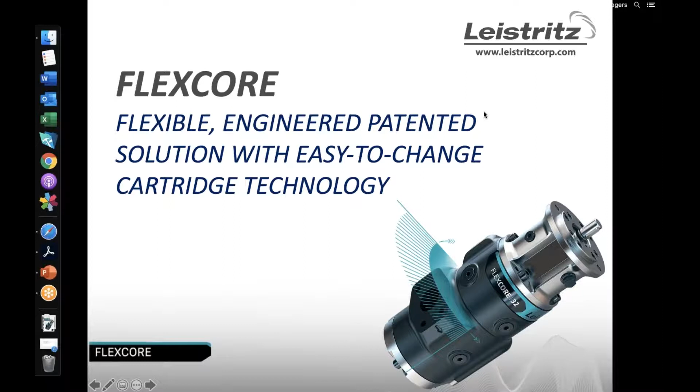I want to start off by giving a quick overview of Leistritz Advanced Technologies Corp. As you can see, Leistritz has been around for over 100 years. The company was founded with the goal of developing exceptionally engineered products, and this tradition continues today. The first product manufactured was turbine blades, and 20 years later, the first screw pumps were produced. We've continued to modify the design to meet current requirements by working closely with customers and the industry, proving ourselves as industry experts and leaders in engineered solutions. While our product development started and continues in Germany, we've been in Allendale, New Jersey for almost 50 years supporting the Americas with value-added solutions, product management, customer support, and sales engineering.

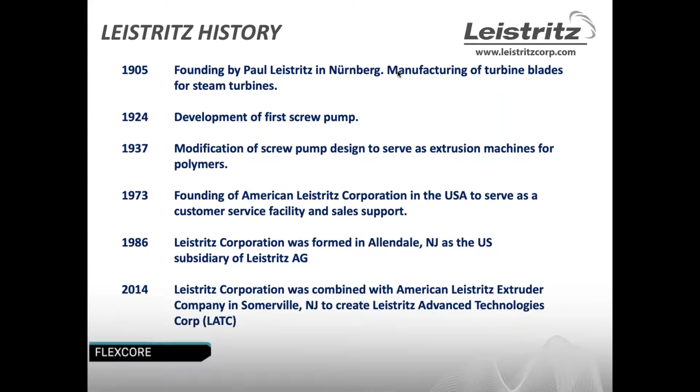Today's Leistritz Advanced Technologies Corp, or LATC, is made up of 4 divisions: screw pumps, machine tools, turbine blades, and extruders.

Today we are going to discuss the Leistritz Flexcore pump series, the applications it can be used in, and a brief overview of the pump technology and features. We also have an animation and video showing the features of a Leistritz Flexcore pump. Our hope is when you leave this webinar, you have a better understanding of the Leistritz Flexcore pump series and the benefits it can provide.

Here are a few applications that are a great fit for a Leistritz Flexcore pump. Flexcore can be used in a wide variety of markets doing multiple applications, serving end users and OEMs, including lubrication services for compressors or turbines, seal or lube oil consoles, boilers for burner or fuel oil, and marine applications for engine room lube oil or fuel oil.

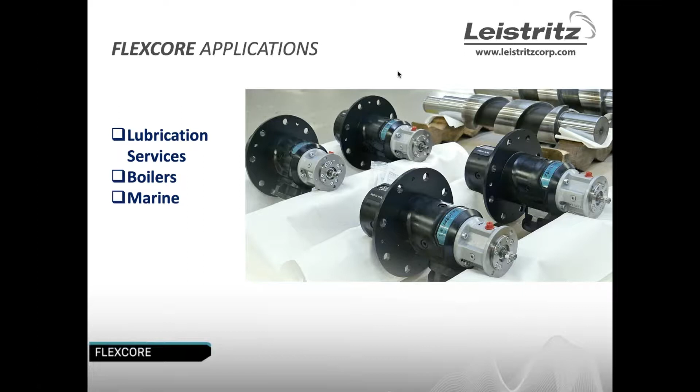Before we go into the specifics of the Flexcore pump family, I want to spend a minute talking about the technology behind Flexcore. It is a 3-screw pump containing 1 power rotor and 2 idler rotors, 1 mechanical seal, and 1 external bearing. All of this is housed in a pump casing that has the suction and discharge connections.

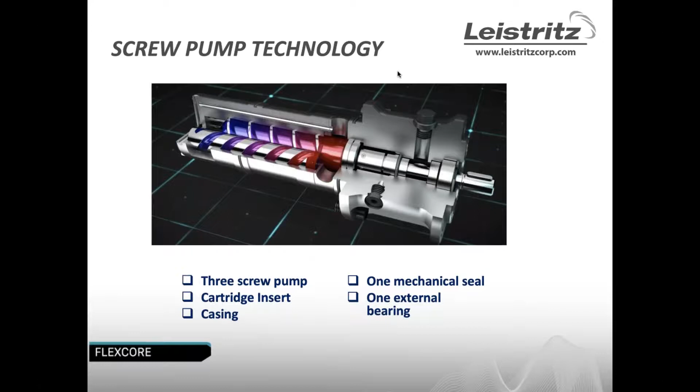Now we are going to get into the specific design and features of the Leistritz Flexcore pump series. The Flexcore cartridge insert, shown on the right, is easy to change cartridge technology that makes changing the pump rotating elements faster and easier than ever. In combination with the proverbial Leistritz quality, which is virtually wear-free.

The Flexcore has a patented internal hydraulic balancing system that provides the following technological advantages. It hydrodynamically balances the rotors within the pump. It moves the pump fluid through the mechanical seal chamber, preventing heat buildup. And finally, because of this internal balancing, the mechanical seal only sees suction pressure. It does not need to be designed to handle discharge pressure.

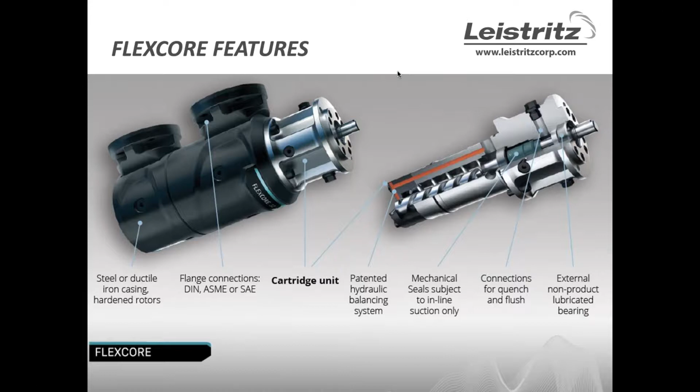The materials of the Flexcore casing come in two options. On the left is the Flexcore SC, which has a carbon steel casing. And on the right is the Flexcore CC, which has a ductile iron casing.

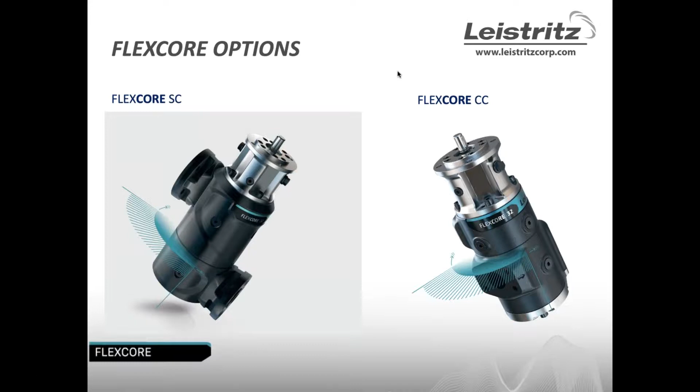The Flexcore pump family is the next evolutionary stage in the pump sector. The custom modularity of the housing and patented pump insert allow the Flexcore to adapt to any installation position. The suction and discharge flanges can rotate in 90-degree increments independently of each other, allowing customers maximum flexibility for their system layout. The Flexcore also has the option of the suction flange being located axially, as you can see in the orientation shown on the far right.

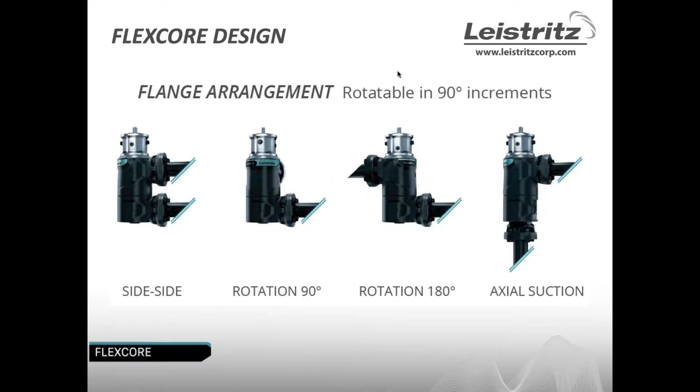There are many options for mounting the Flexcore pumps, depending on the application and space available. These include flange mount, foot bracket mounting, and also tank mounting.

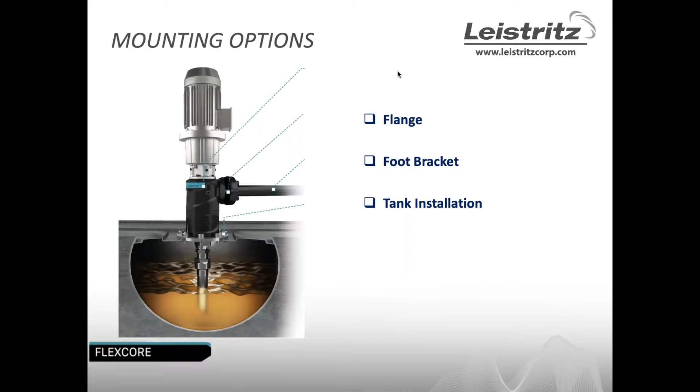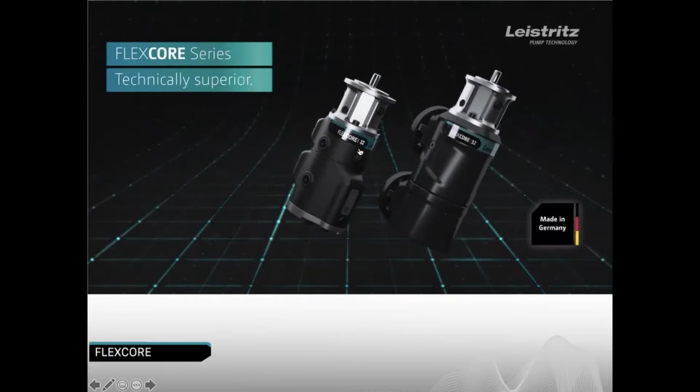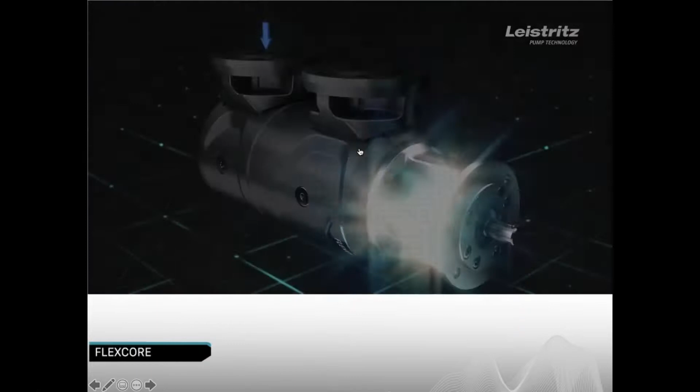Here we have an animation of the Leistritz Flexcore showing the design features that we have been discussing so far. The blue arrow indicates the suction flange of the Flexcore, while the red arrow is showing the discharge flange. As mentioned earlier, the flanges can be rotated in 90-degree increments independently of each other, while the suction flange can be changed to axially as needed.

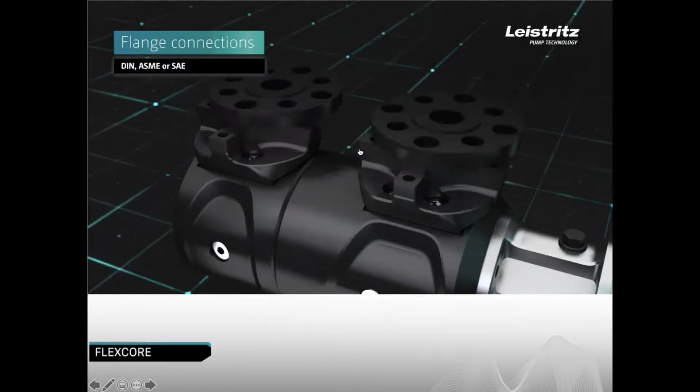The flange connections on the Flexcore are suitable for DIN, ASME, and also SAE, allowing maximum options for customers to modify the Flexcore as needed.

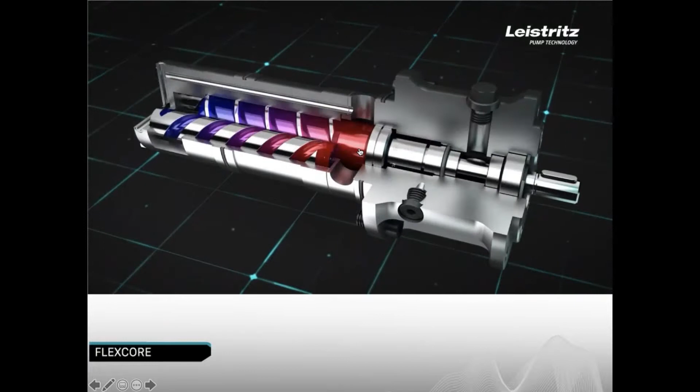Now you can see the cartridge of the pump, specifically the internals of a Flexcore, in operation. The pump fluid enters from the suction side, shown in blue, and moves towards the discharge of the pump. The internal balance line can be seen running across the top of the cartridge.

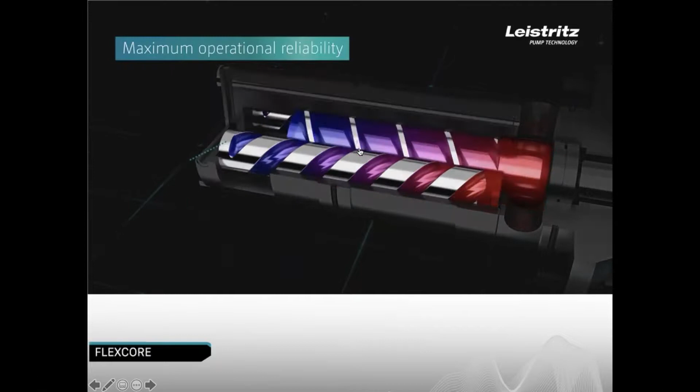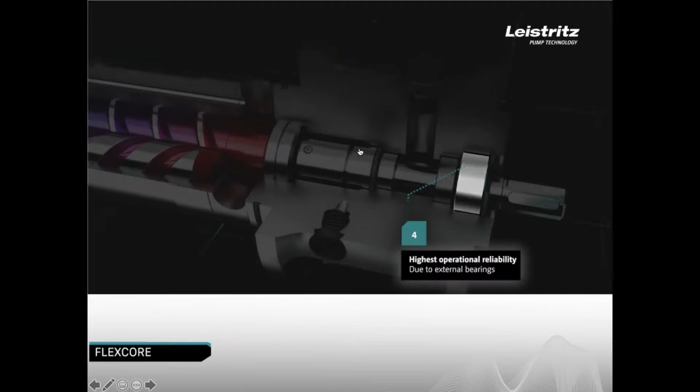The Flexcore mechanical seal chamber is designed for common DIN mechanical seals. The bearing is external and does not come into contact with the pumped fluid. As you can see, only 4 screws are needed to be removed in order for the cartridge to be taken out of the casing.

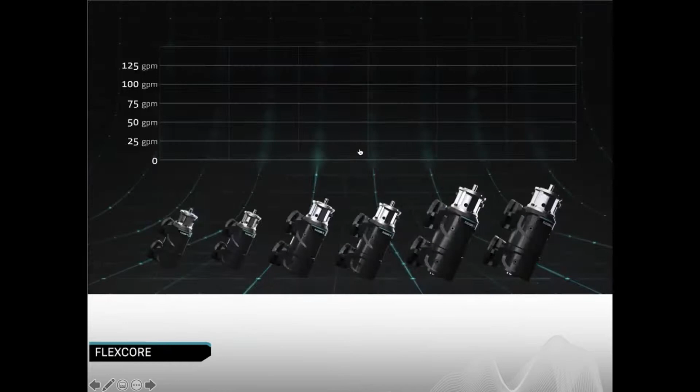Here are the 6 available sizes of Flexcore units and their flow ranges.

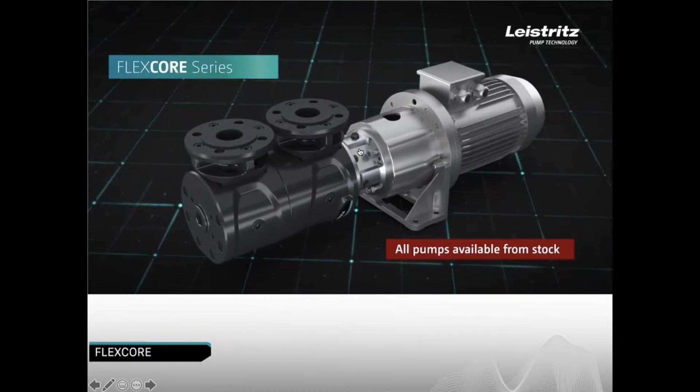Finally, we can see a Flexcore pump that is horizontally mounted using a footed pump-to-motor adapter that supports both the pump and the motor.

Here is an overview of the operating ranges of the Flexcore series. The viscosity range is 1.1 to 2,500 centistoke. The maximum operating temperature is 356 degrees Fahrenheit. The maximum allowable suction pressure is 116 psi, while the maximum differential pressure is 580 psi. The flow rate ranges from 1.8 to 149 gallons per minute.

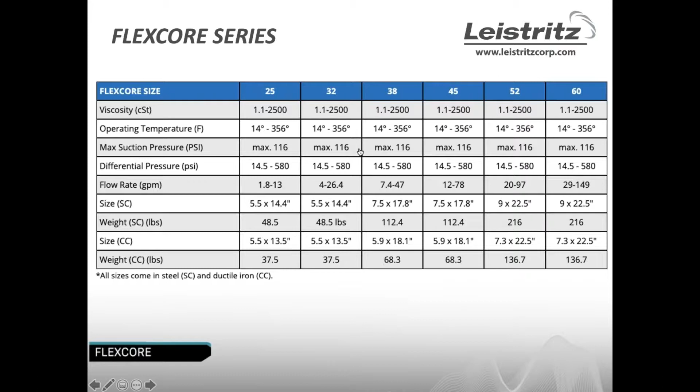Here are the key benefits of the Leistritz Flexcore. The flexibility that the Flexcore provides by having 20 different flow direction possibilities allows it to replace almost all screw pumps that are customarily used in the market and even in existing systems.

The pre-assembled cartridge, certified easy to change, reduces downtime. Instead of replacing the entire pump, only the pump insert is required.

The Flexcore SC, the carbon steel casing option, meets API 614 and 676 standards, except for a few comments and clarifications that will be provided with any Flexcore quotation.

The custom modular design allows the pumps to be delivered from stock within a very short period of time.

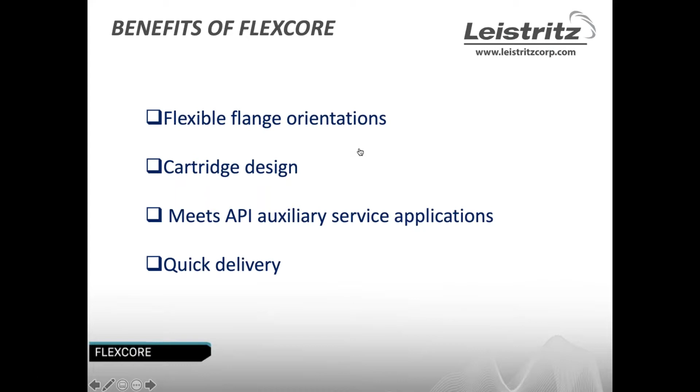Here we are going to go over 2 case studies from customers that have benefited from the exceptional features of the Leistritz Flexcore pump series. The first case study is from a lube oil console OEM. A lube oil OEM had finalized their project design, ordered and received delivery of their Flexcore pumps.

The end user had unforeseen changes that required modifications be made to the lube oil system, resulting in design work and retrofitting of piping by the OEM. The fact that the Flexcore flanges rotated orientation post-manufacturing and delivery allowed the OEM to easily make the necessary changes, saving time and money for the end user on change orders while keeping the project on schedule.

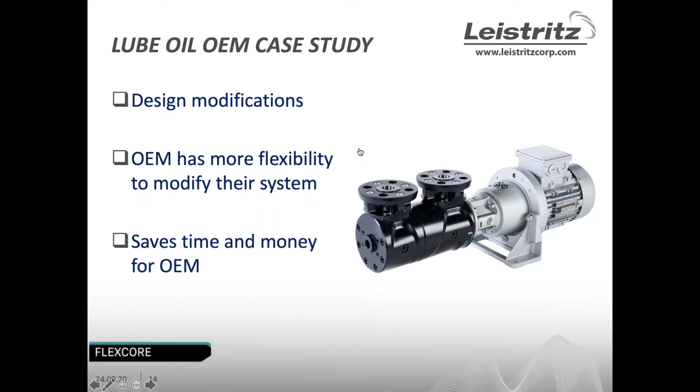The second case study is from an end user in the energy market. In the past, this end user has had to change the type of pump being used at their facility when the type of fuel oil changed from heavy to light.

They also had to modify their piping when installing the new pumps that were required to accommodate the change in fuel oil. The customer chose the Leistritz Flexcore pumps because of its ability to handle a wider range of viscosities than other pump technologies, eliminating the need for future pump or piping modifications in the event that the viscosity ever needed to be changed again.

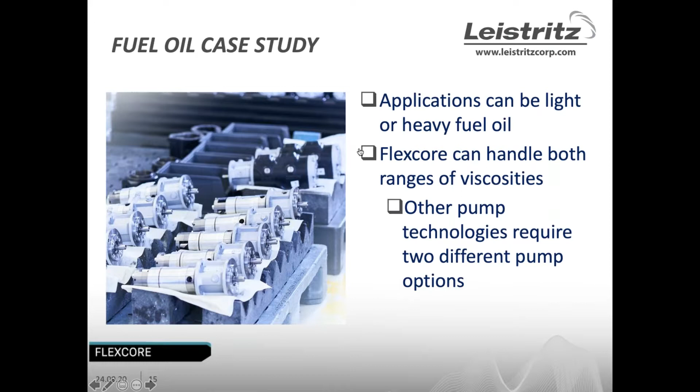To show how easy the Flexcore pump is to work with in the field, we have put together this quick video. Obviously this video is sped up, but in real time, this took 5 minutes from start to finish.

To change the pump insert, you only need to remove 4 screws. The easy to change cartridge technology can be completed without the need for special tools and without special knowledge.

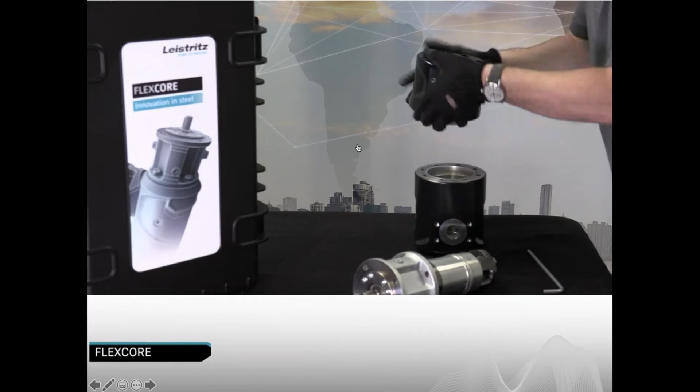The same is true for rotating the flange orientations. Only a minimum of screws need to be removed. Here Ken, our service manager, is showing the different possible options for the flanges.

When the preferred flange arrangement is achieved, we can see how easy it is to reassemble the pump casing, which includes reinserting the cartridge unit.

Many of our customers like to have spare cartridges for quick and easy service. Remember, the benefit of the cartridge design allows you to easily swap out cartridges in the field and perform maintenance at your convenience.

In order to get a quote from Leistritz, here is the initial information that would be required: flow rate, suction pressure, discharge pressure, temperature, and the fluid being pumped along with the viscosity. Again, because of the modular design, Flexcore pumps are in stock and can be delivered quickly.

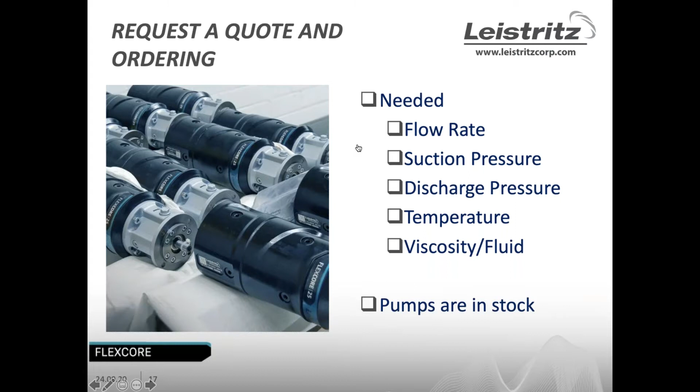Thank you, Chris, for bringing us through the Flexcore solution and showing us how we can place an order. I'd like to spend a minute going through our available service and support. We are very active in working with our customers after the sale and installation of any of our products.

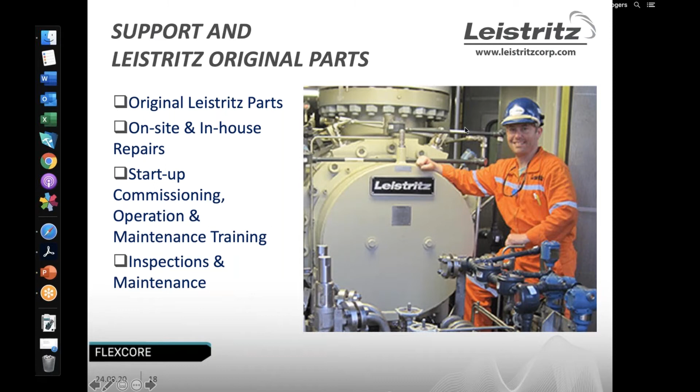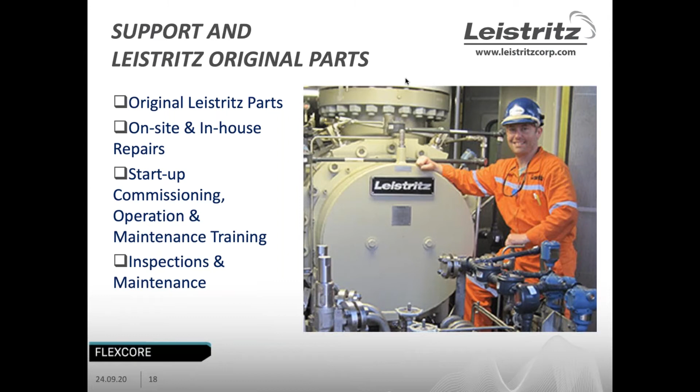To best serve you, we make sure we have original Leistritz parts in stock, so replacement or spare parts are just a phone call away. Once a pump is purchased, we can help with startup commissioning and then work with your team to train on both operations and maintenance. Pumps should be inspected every 2 years to keep it in top working condition, and this is also a service we offer.

And lastly, if something were to happen to your pump, we are available for both on-site and in-house repairs.